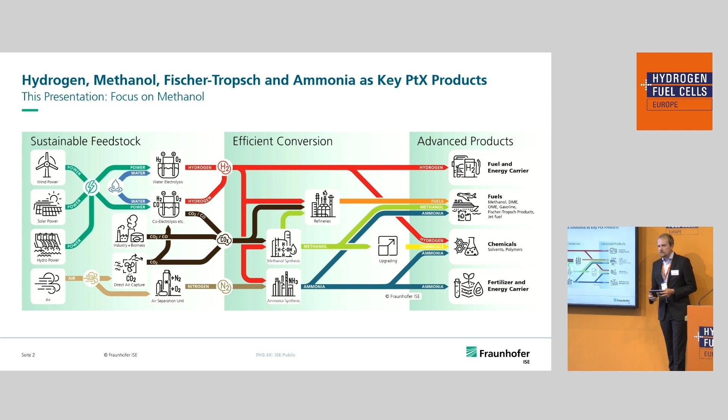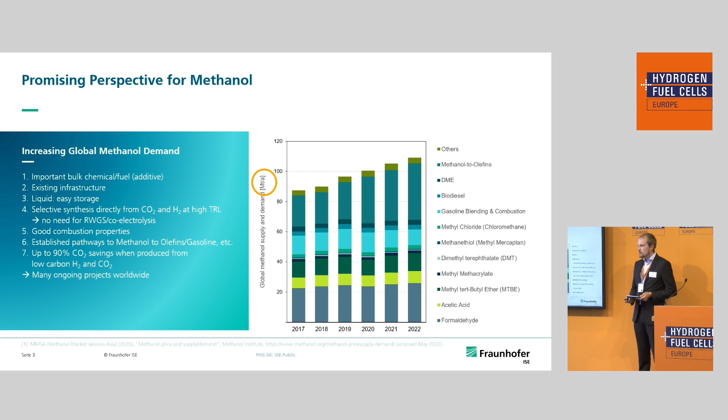Methanol being a very good liquid energy storage, we expect this number to rise and the importance of methanol to become ever greater. It has great combustion properties. It can be produced directly from CO2 and hydrogen, so there's no issue of reverse water gas shift. So there's good reasons why there's a lot of projects going on worldwide and why we as Fraunhofer ISE want to learn more about this synthesis in detail.

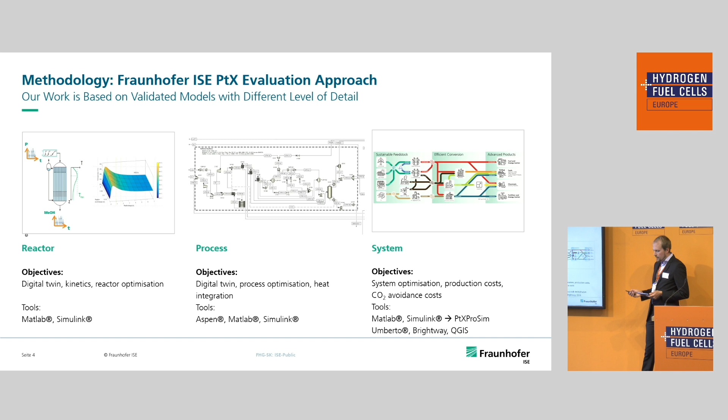We're doing the approach in several levels. We're looking at the reactor side, we're looking at the process side where the reactor is integrated, and then of course the system where we have the largest perspective on everything. We have appropriate tools corresponding to the specific objectives in the different areas of work. And the way these tools interact can be seen on the next slide.

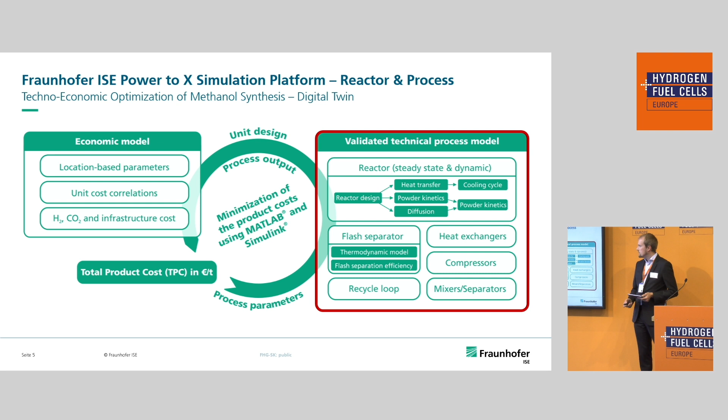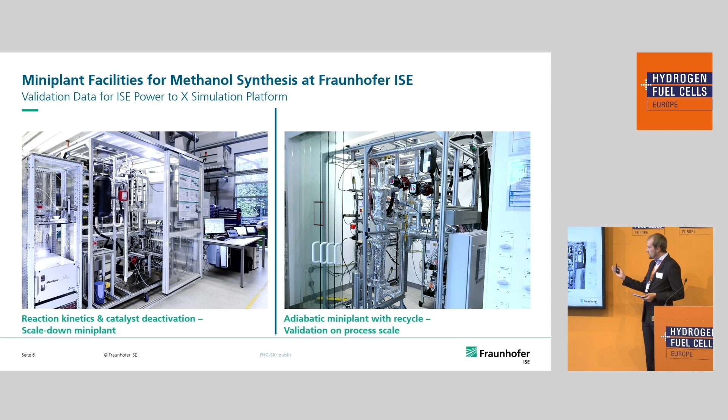The two plants we used to create the data and to validate it are the Power to Methanol mini plant on the left side and the Carbon to Chem mini plant on the right side. The scaled-down mini plant is really unique as we can observe exactly what happens on the reaction level. Methanol synthesis is a reaction that happens in a large reactor with 3,000 tubes. Impossible to do in a research institute, of course.

So first thing, we do a numbering down. We choose one of these tubes, but it's still too large for us, so we scale it down to have something that works well in our labs. Conserving some very specific particularities, some adimensional numbers, we can still use the results from this reactor in the scale-up and deduce properties of the industrial process. Here are some facts about the plant.

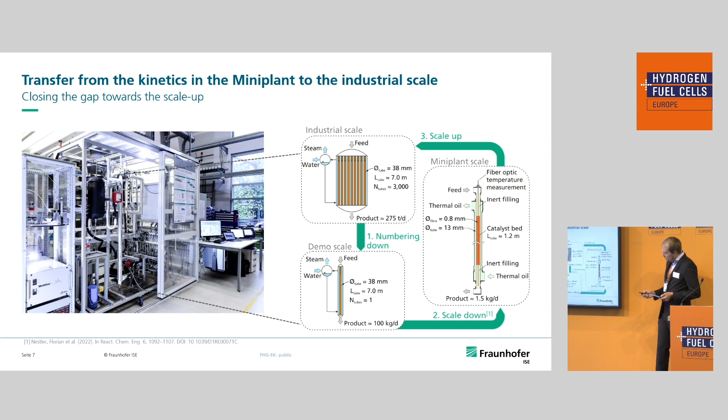It has a very broad range of operation, and we could study the dynamic operation in great detail. We were able to measure the temperature profile with a fiber optic measurement every 2 or 3 millimeters, and the composition was measured by FTIR, so highly dynamic measurements there as well, with the objective being describing the kinetics very well and learning how a methanol synthesis can be operated dynamically.

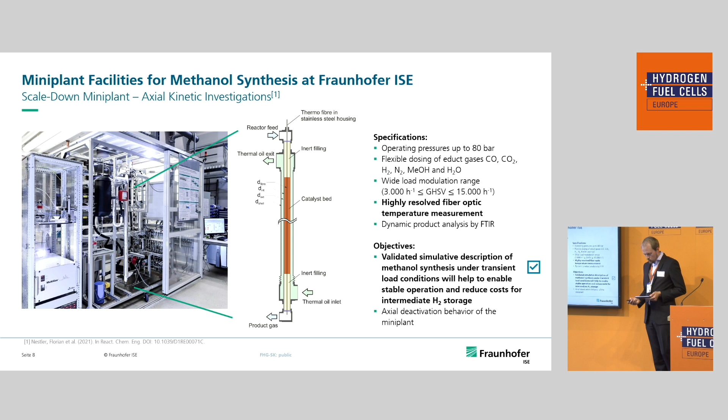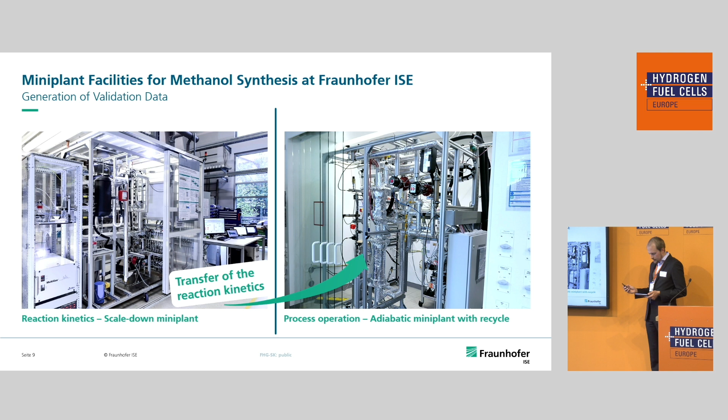Having collected the data in the lab, we wanted to see if the model was transferable to a real-world application. And here, in the project Carbon2Chem, we ran an adiabatic mini plant with recycle at the ThyssenKrupp steel mill in Duisburg, one of the largest steel mills in the world, one of the largest CO2 point sources in the world. Steel mill gases are super interesting because they are an abundant source of carbon dioxide, of carbon monoxide, and hydrogen.

And together with our partners, we ran this plant for several years. We designed and commissioned and operated it, but it was in Duisburg at the customer's location. The gas cleaning of these blast furnace gases was conducted by Linde and ThyssenKrupp Industrial Solutions. The catalyst was provided by Clariant.

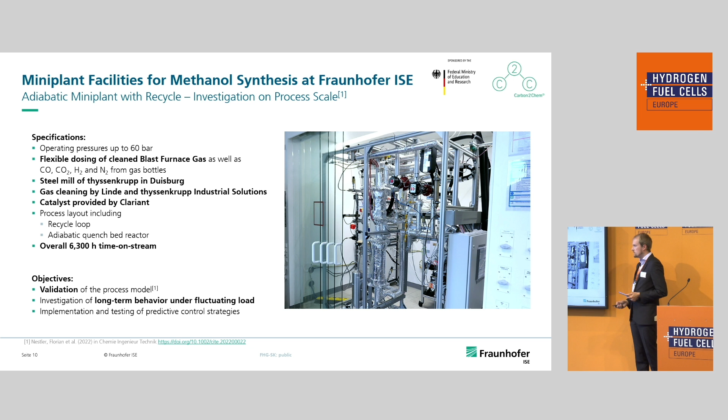We could operate the plant for over 6,000 hours, producing several thousand liters of raw methanol, with the objective being validating the process model we previously recorded and studying the long-term effects of such an operation. And the data I will be able to show you today is really the first of its kind. To my knowledge, nobody has conducted methanol synthesis from blast furnace gas.

Let me explain the chart because it's a little busy. So on the top graph in black, we have the weight time yield, so how much methanol is produced per unit of catalyst. Unfortunately, I can't show you the real numbers. It had to be normalized, but what you can see is that over these 3,000 hours, the catalyst performed in quite a stable way. There's no deactivation. That means that the gas cleaning is working well. There's no residual poisons.

In green here, we have the methanol mass fraction. We're continuously monitoring the composition by measuring the refractive index. And you might ask, why is there still such a spread in the results? Why is it not a constant line? Well, that's because we're using blast furnace gas. And the blast furnace gas is a dynamic gas because of the way the blast furnace is operated, the composition and the amount of gas that is available changes drastically.

So in orange, for example, we have the carbon oxide ratio. That is the ratio between carbon monoxide and carbon dioxide. That changes over time depending on what kind of iron ore or what kind of coal you have. And in blue, we have the inert composition, so how much nitrogen, how much methane is contained in this gas.

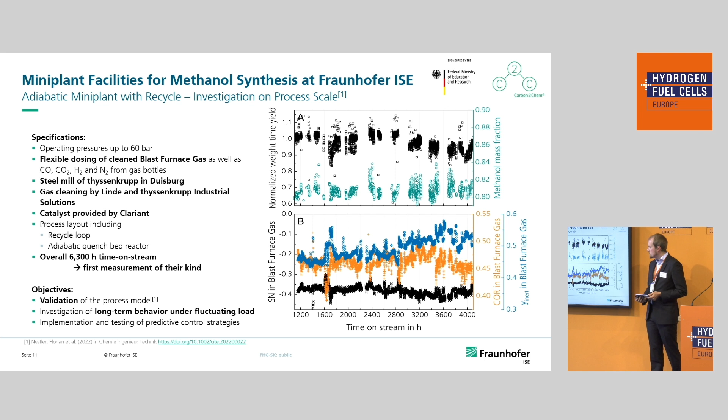This data is only a subset of what we've done. You see some blank spots. That's where we ran our campaigns. But this is the benchmark that we repeated again and again to see how well the reactor is performing over time. So I can proudly say that here our objectives were achieved.

We compared the measured data, that's always on the x-axis, and the simulated data, that's on the y-axis, for several parameters: the weight time yield, the stoichiometric number in the loop, the inert content in the loop, and the carbon oxide ratio in the loop.

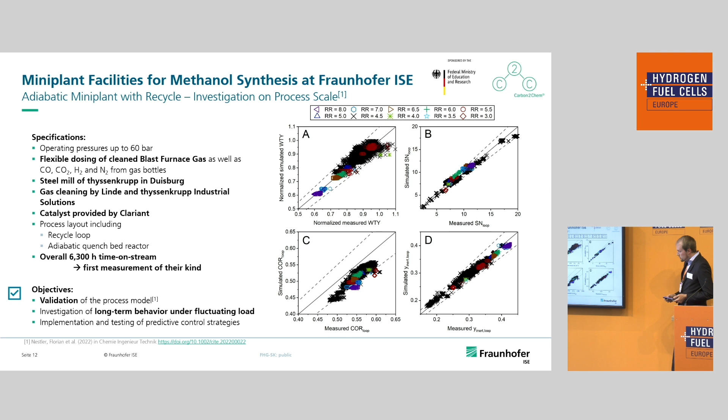The results have recently been published in Chemie Ingenieur Technik, and there will be many more publications to come with the details. But what we can really say is, with our process model from an isothermal reactor, we were able to validate an adiabatic reactor, and that gives us very good hope that we can now, in the next stage, also describe large-scale reactors for industry.

Let me come back again to this graph to give you an outlook. So really the next step is to design large-scale plants and provide accurate economic models for several locations around the world where we will be conducting methanol synthesis from renewable gases.

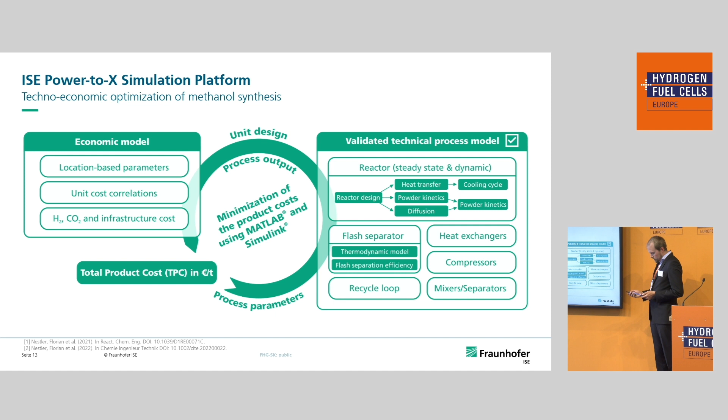Okay, next up some conclusions, maybe for your report back home. Fraunhofer ISE offers validated models on different levels of detail. We can deal with process dynamics very well, as shown in the world's first demonstration of methanol synthesis from blast furnace gases.